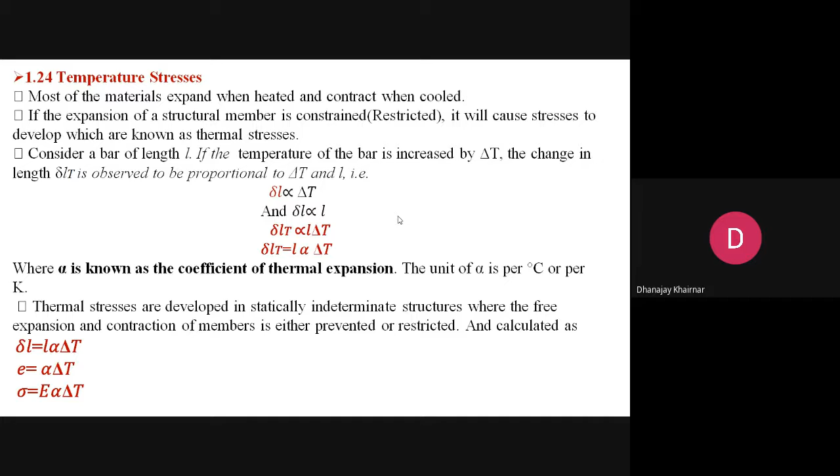In that case, are thermal stresses induced or not induced? In such a case, is thermal stress induced or not induced?

Yes or no? When there is free expansion, thermal stresses are not induced. When there is free expansion, the thermal stresses are not induced. Am I audible? Yes sir. Okay, so when there is free expansion, are thermal stresses induced or not induced? Not induced, not induced.

When thermal stresses are induced, that is when the free expansion is prevented. When free expansion due to the temperature difference is prevented, in that case the thermal stresses are induced. Is everybody getting my point?

Yes sir, okay. So when there is free expansion, thermal stresses are not induced. When the thermal expansion is prevented by external means, or the free expansion is restricted or constrained, in that case the thermal stresses are said to be induced or produced.

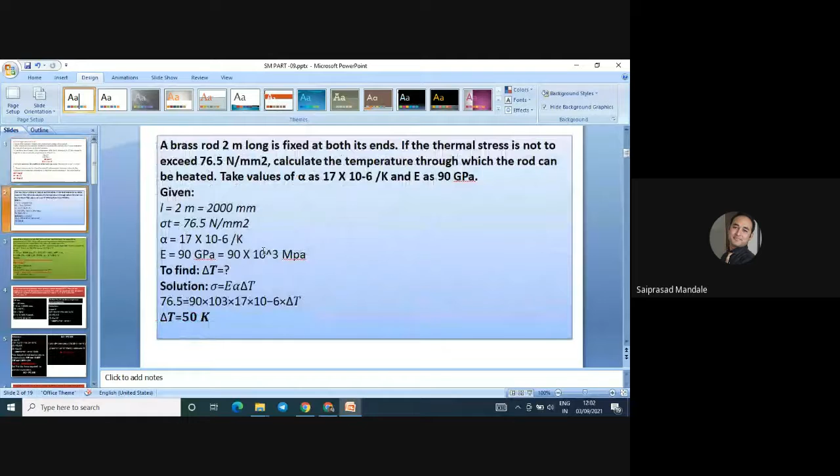Okay, so many thumbs up are there. It means the formula and the slide are clear for everybody. Now next, looking for...

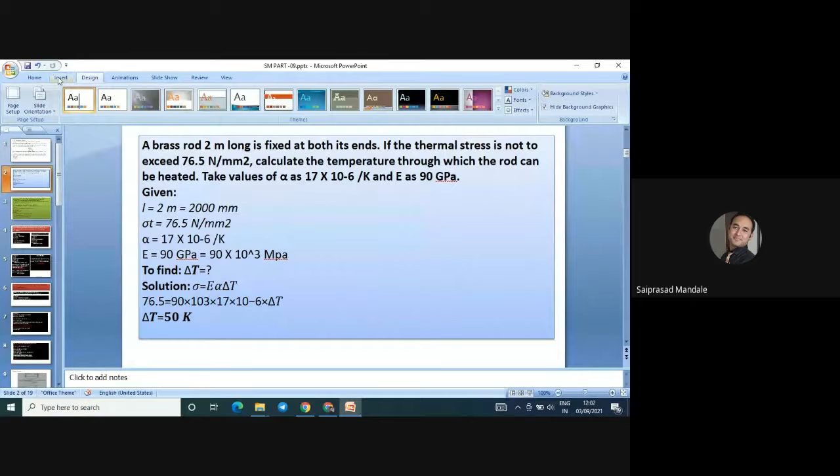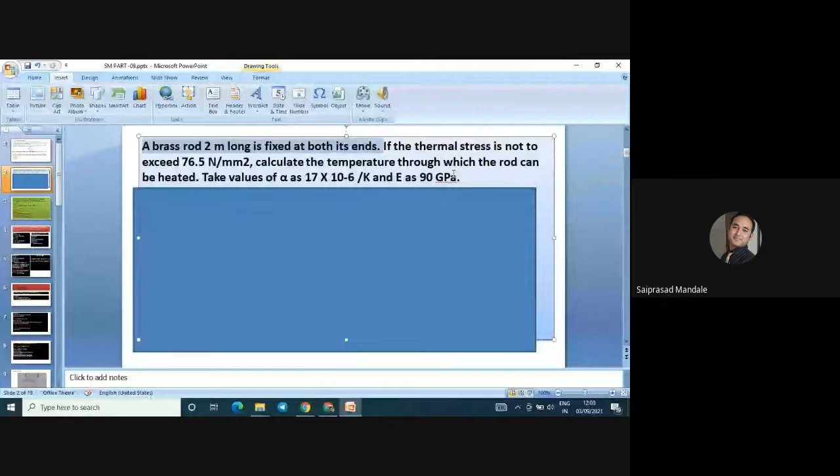I'm going to take a basic numerical. A rod is fixed at both ends. You have to be very careful while reading the numerical. Fixed at both ends, take the value of alpha as 17 into 10 raised to minus 6, and E as 90 GPa.

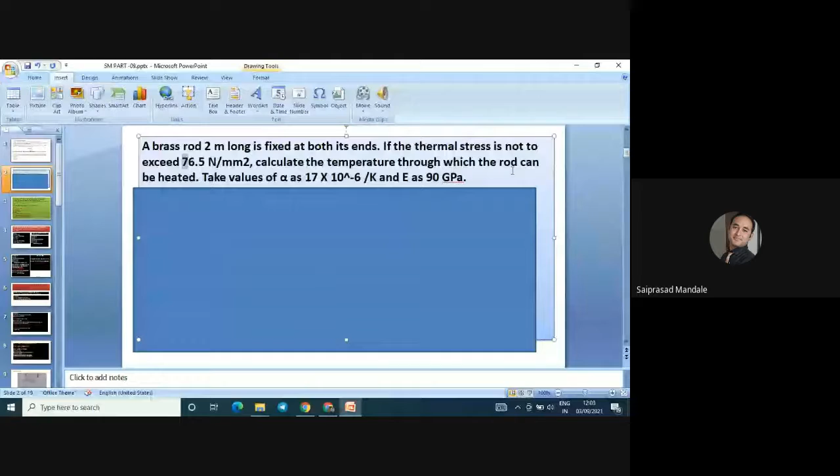Let us find out the thermal stress not to exceed, that is sigma T is given to us. Calculate the temperature through which, so delta T has to be identified. Can anybody tell me how to calculate delta T as the stress is given to us?

These are the three formulas that are required for us. What are the things we do have?

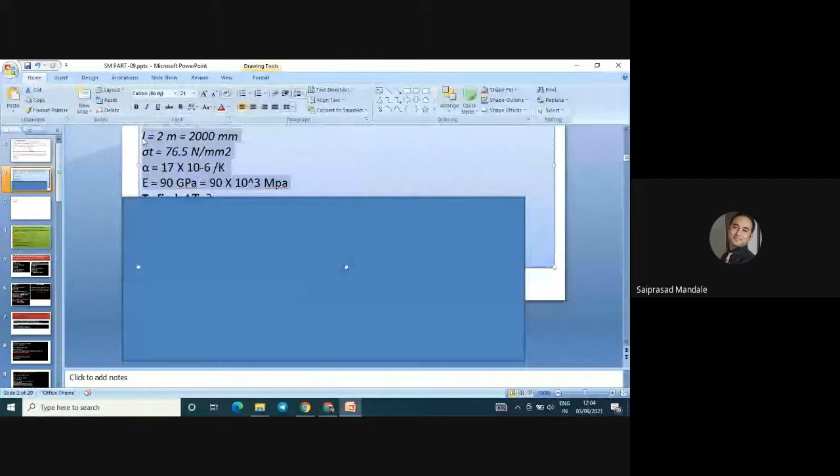So this is given to us. L is given to us. E is also given to us. What is to be identified? Delta T is to be identified.

Can anybody tell me if we have the different formulas with us? We are having these three formulas. So can we identify delta T?

Let us have a look. L, yes, we have. Sigma T. So L we have. Do we have a sigma? Yes, we have a sigma. This is we are having. Sigma we have. L we have. Then...

Tell me. Everything is there in front of you.

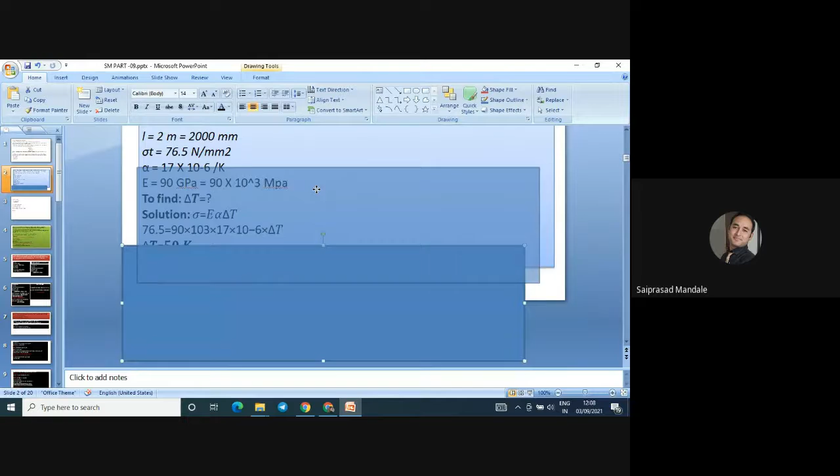Please go ahead and solve this numerical. I'm going to give this. You have to pick the value and put this value in the given equation. Tell me the answer. Tell me the answer.

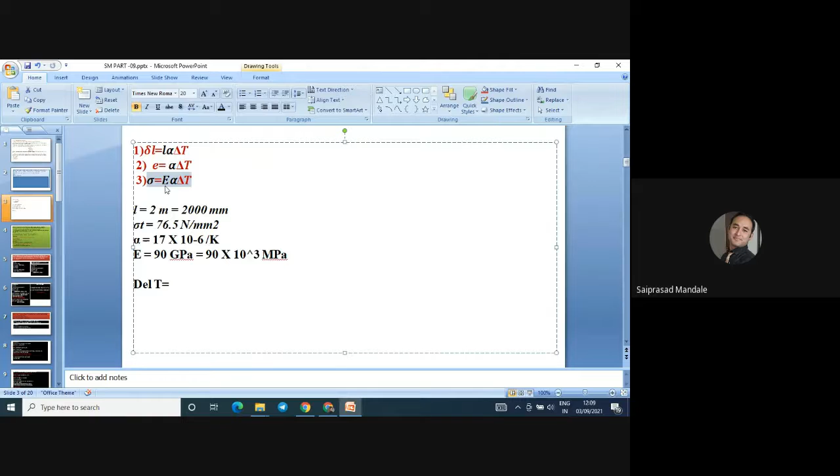When you use this formula, copy, paste. Sigma they have given us. So sigma is equal to E. Copy alpha. Delta T is to be identified. Therefore, delta T is equal to...

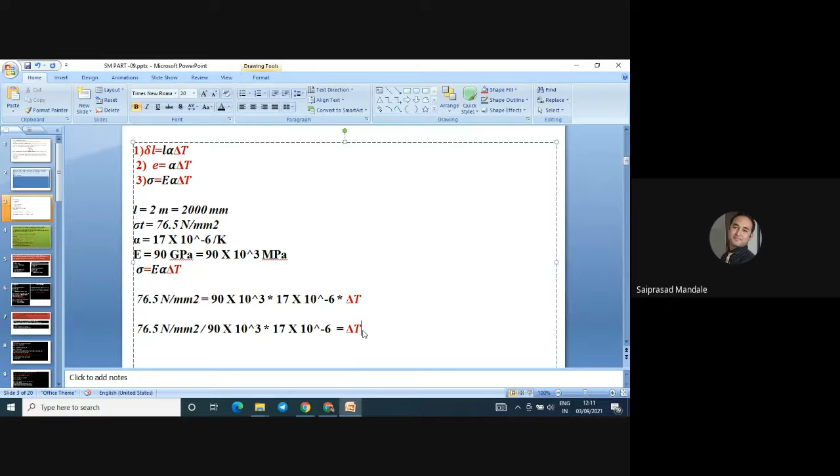T है तो sir, how much? 50. Let me check the answer. Okay, so 50 Kelvin is the right answer. 50 Kelvin is the right answer.

Very good, everybody has to do this. I guess you can understand. Very good, so many answers are there: Tahil, Jagtap, Nilesh Kuwar, Bagulo. Very good, so many people are giving the answers. So try to understand, the numericals are very easy, but the complete session will be revolving around these three. We are looking for more formulas, but these are the very basic formulas that you have to remember. Okay, so numerical number next.

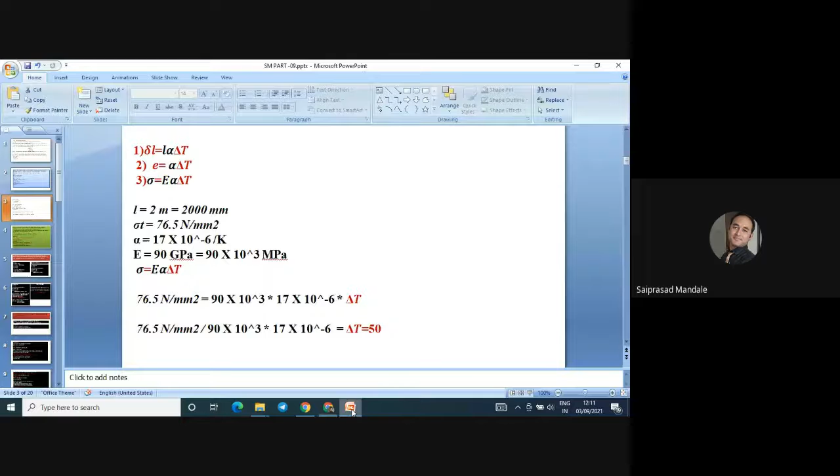Numerical number next. A rail of 10-meter length each is laid on the track in the morning when atmospheric temperature was 12 degrees Celsius. A gap of 3 mm was kept between two consecutive rails. At what maximum temperature will the rail remain stress-free? Second, if the temperature is raised further by 10 degrees Celsius, what will be the magnitude of stress induced in the rail? Take E equals 200 GPa, alpha equals 12 into 10 raised to minus 6 per degree Celsius.

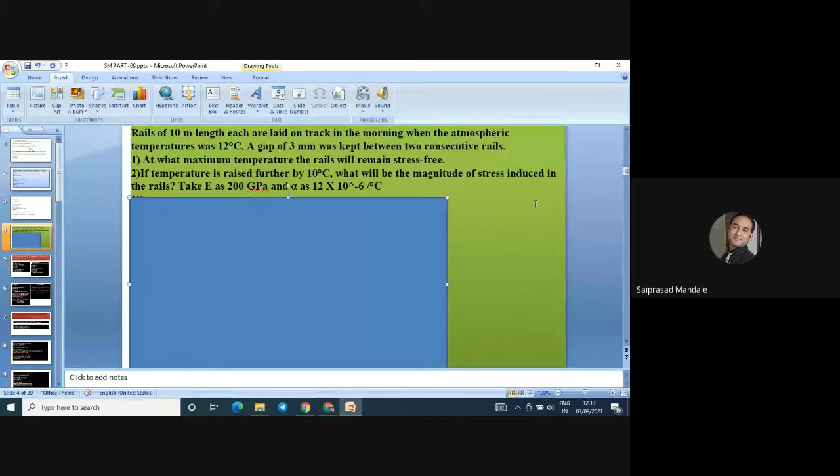So we have to identify those conditions, those answers. Okay, let us see what they have given us. A rail of 10-meter length, so L is given to us. Let me check what is happening. L is given, that is 10 meter, that is 10 into 10 cube mm.

Laid on the track in the morning, the atmospheric temperature is 12. So T1, the atmospheric temperature, is given to us as 12 degrees Celsius. A gap of 3 mm was kept, so delta L is 3 mm gap. It is nothing but the gap in between the two rail lines. Delta L is given to us, that is 3 mm, kept between two consecutive rails.

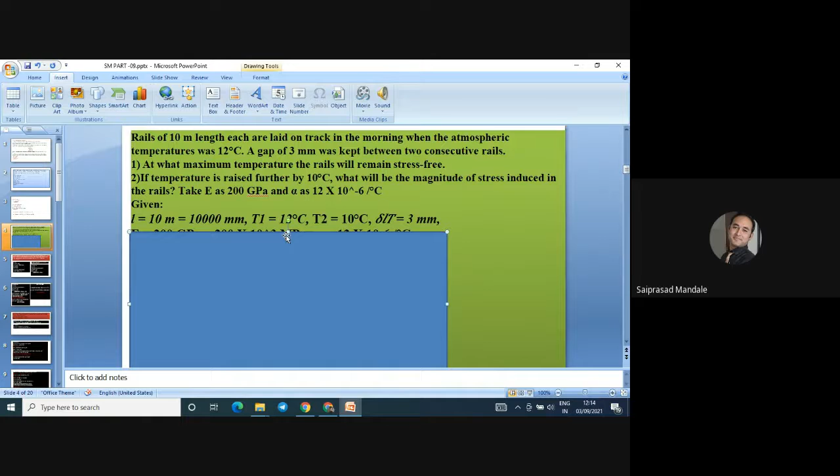At what maximum temperature? Okay, take E equals to, so E is given to us and alpha is given to us. E is 200 GPa, that is 200 into 10 raised to 3 MPa, and alpha equals 12 into 10 raised to minus 6. Try to understand what we have to identify. This is the given data.

At what maximum temperature will the rail remain stress-free? So it is nothing but a rail line, and the delta L is given to us.

So for the first condition, to understand the solution of that numerical, we must know when the stress is induced. When does the stress induce? That we have to identify first.

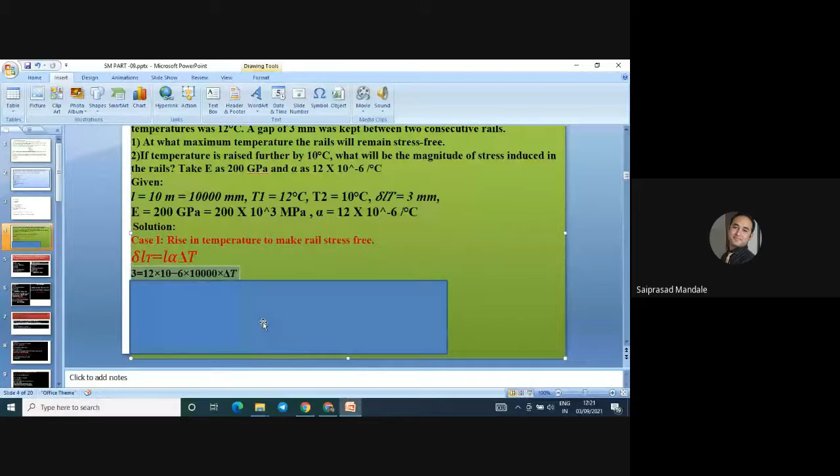मेरा क्वेश्चन समझ में आ रहा है आप लोगों को? अगर आपने कैलकुलेट जो किया है डेल्टा टी, फॉर एग्जांपल ये अगर 20 डिग्री सेल्सियस आता है, तो उसका मतलब क्या होता है? वो कितना एक्सपेंशन करेगा? कितना एक्सपेंशन करेगा?

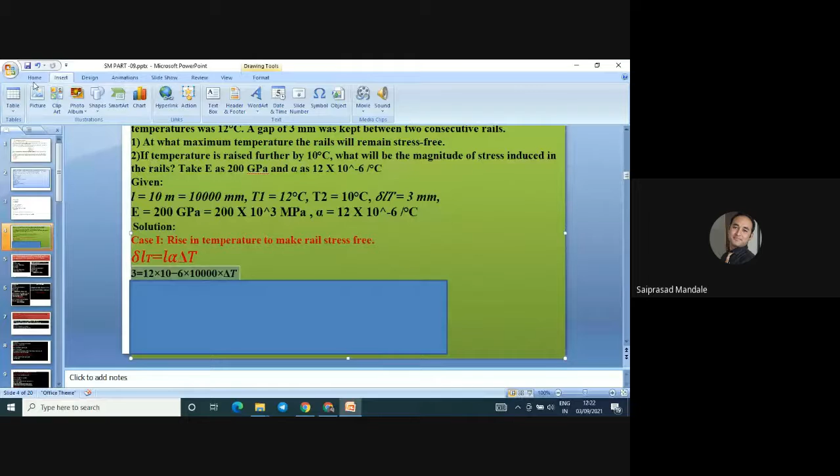अरे 3 mm का एक्सपेंशन करेगा, यहाँ पे दिया ना। ये फॉर्मूला क्या बोल रहा है? इस फॉर्मूले को समझ लो आप। ये आपको कंफ्यूजन करेगा क्योंकि इसका जवाब हम लोगों को सेकंड टैब में लगने वाला है। डेल्टा एल 3 mm का इलोंगेशन होने के लिए हम लोगों को डेल्टा टी इतना टेम्परेचर लगेगा। अगर मेरा डेल्टा टी 20 डिग्री सेल्सियस आता है, इसका मतलब ये होता है कि when and only when the delta T is equals to 20 degrees Celsius, in that case the rail will expand through 3 mm. Okay, so go ahead, calculate the value of delta T and tell me the answer.

Go ahead, calculate the value of delta T and tell me the answer. Please go ahead, calculate the delta T and tell me that. 25 is okay, okay, very good. So many answers are there. Okay, very good, Sahil Gangi, okay very good, 25. So let me check the answer. 25 degrees Celsius is the right answer.

Now, this is the first answer. At what maximum temperature the rail will remain stress free? जब 25 डिग्री सेल्सियस की वजह से 3 mm होगा तो स्ट्रेस फ्री रहेगा। Now, try to understand question.

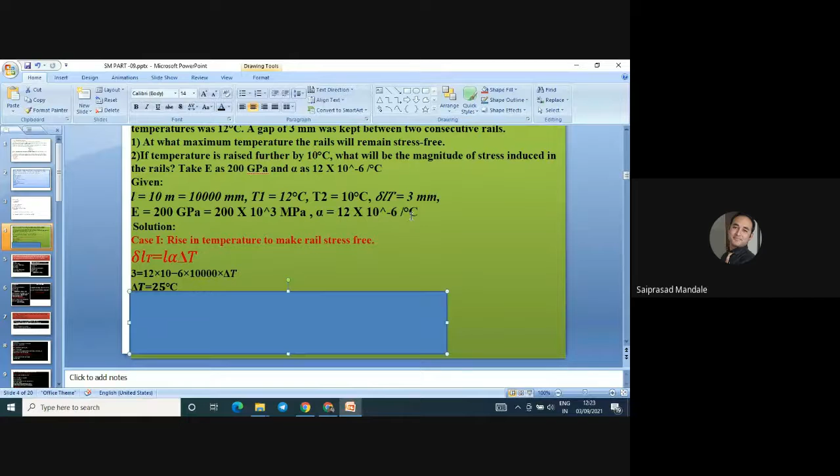If the temperature is raised further by 10 degrees Celsius, what will be the magnitude of the stress induced in the rail? Okay, क्या बोल रहे हैं? If the temperature is raised further by 10 degrees Celsius, the temperature 10 degree ने वाढवलं, what will be the magnitude of the stress induced in the rail? Now give me the answer. Right now delta T is 25 degree, which is

responsible to elongate the bar to 3 mm. Now this is 25 degrees Celsius. Now I am going to look over here where it is T1 12 degrees Celsius and T2 is equals to 10 degree. If in that 10 degrees Celsius, 12 degrees Celsius, if I add 10 degrees Celsius, so the temperature becomes how much? 12 plus 10 is equals to how much? 22.

So when the temperature will be 22, at 22 degrees Celsius, is there thermal stress induced on that member rail at 22 degrees Celsius? The temperature stress will induce in that bar or not? At 22 degrees Celsius, right now your answers are correct, 25. Now my question is, at 22 degrees Celsius or below 25 degrees Celsius temperature, the rail will produce thermal stress or not? Not. Why not?

Perfectly correct answer. Who has given the answer? Dhananjay. Dhananjay, okay, why not? Because both ends are not fixed, yes, yet both ends are not fixed. Minimum temperature requirement is 25 degrees Celsius temperature required to fix the end. After 25 means above 25 degrees Celsius, the end will be closed, and after 25 degrees Celsius, the stresses will start to build in. Very good, Dhananjay.

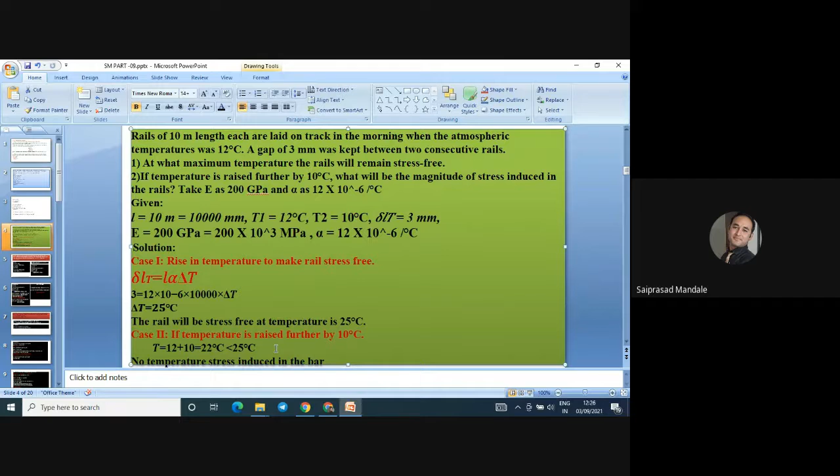Got my point? Why this answer? Because minimum temperature requirement is 25 degrees Celsius to close the gap. After 25 degrees Celsius, the bar will be subjected to thermal stresses. Everybody got my point? Understood the numerical? Why thermal stress is not induced? Because in order to induce the thermal stresses, the temperature should be above 25 degrees Celsius.

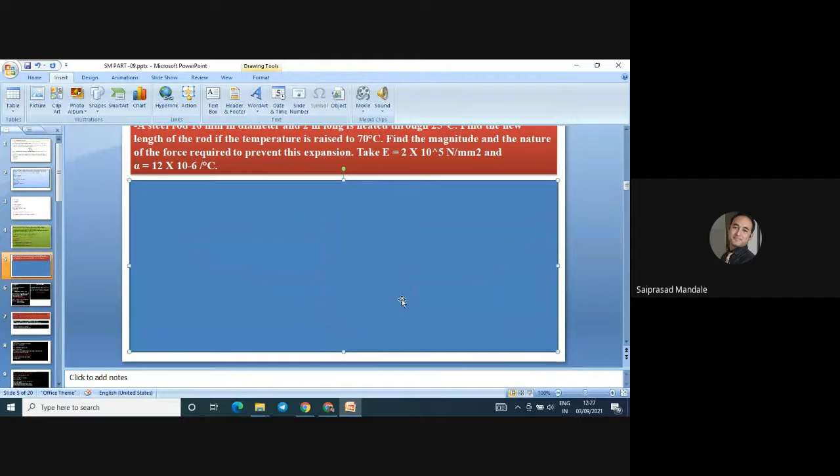Your classroom problem: a steel rod of 10 mm diameter, so D is 10 mm, L is 2 meters long, is heated through 25 degrees Celsius. Find the new length of the rod if the temperature is raised to 70 degrees Celsius.

So this is the initial temperature, this is the final temperature. The difference between both will be delta T, that is 70 minus 25, which equals 45. Find the magnitude and nature of the forces required to prevent the expansion. Take E equals 2 into 10 raised to 5 Newton per mm square, and alpha is equals to this much value.

So what are the different forces acting on that? We have to identify. Let us identify what is given to us, what is to be identified, and then the solution.

Diameter is given to us, length is given to us, temperature T1 is given to us, T2 is given to us, E is given to us, and alpha is given to us. These are the given things. What is to be identified?

They told us to identify the nature of the force. Nature of the force means either it is tensile or compressive. And they told us to identify the value of P, and its nature - either tensile, compressive, or whether it is acting or not acting. We have to determine that too.

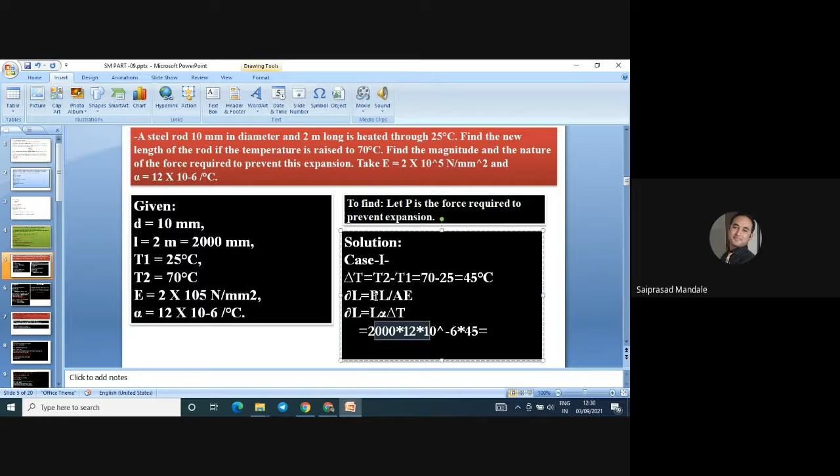Case 1, we have calculated this - that is our delta L, due to the temperature difference. Now initially we have some length, that is 2000. So after the heating, the elongation will be 1.08. The total elongation will be 2000 plus 1.08, so that is the new length.

Now what about the force required? To calculate the elongation, delta L is equals to PL upon AE. So PL upon AE, we are putting the values for the different parameters. Delta L we have calculated, PL upon AE - P we have to calculate. Total length after the loading is this much.

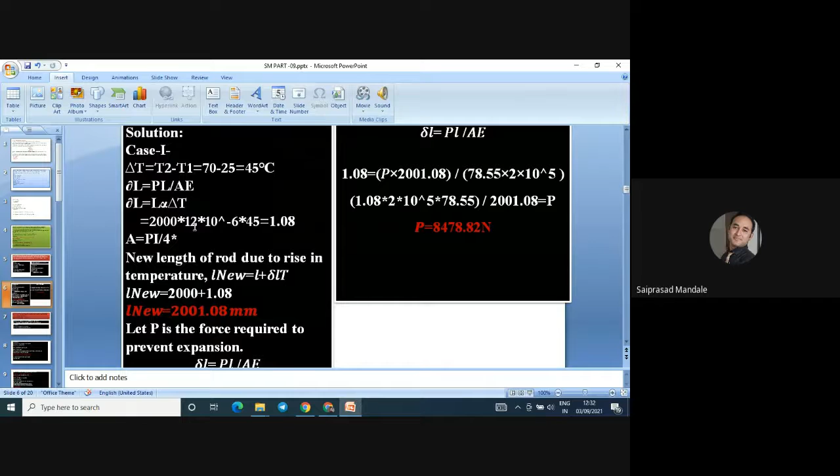Area, as we have the diameter, so we have to calculate the area. How to calculate the area? Let me put it over here. We have to calculate the area, it is pi by 4 into D square. D is 10, so 10 square. Pi by 4 into 10 square - we have to calculate the area, put this in, and calculate the answer.